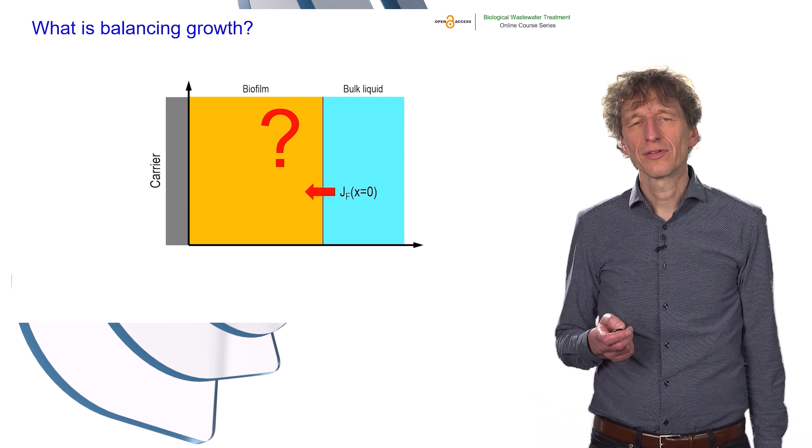Earlier in this course, we calculated the flux of substrate into the biofilm for steady-state conditions. Substrate diffusing into the biofilm leads to growth of bacteria. Question: how can there be a constant steady-state biofilm thickness if new biomass is continuously being produced by growth? On one hand, decay processes balance growth. But in addition to decay, there must also be detachment processes balancing growth. This module is focused on these detachment processes.

At the end of this lecture, you should be able to explain different mechanisms for the removal of biofilm, i.e. detachment. Prepare a material balance considering growth, decay, and detachment. And use the material balance to calculate steady-state biofilm thickness predictions.

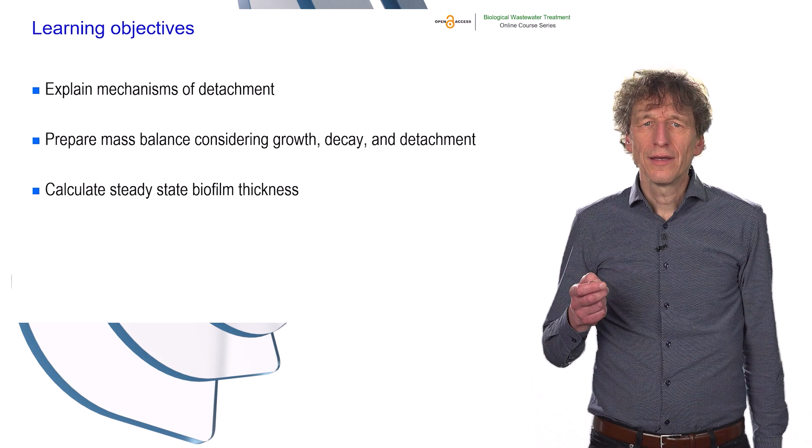Here's a schematic of a biofilm. Let us now prepare a mass balance for the biomass in this biofilm. Accumulation is shown on the left. The terms on the right refer to biomass growth, decay processes to remove biomass, and then the detachment processes.

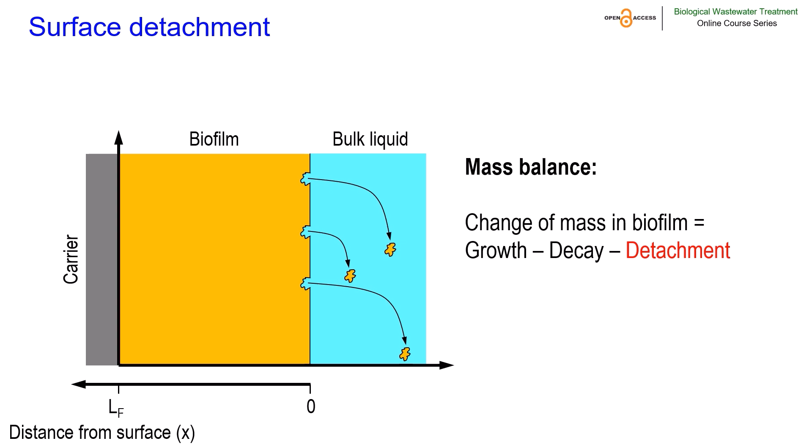Detachment is usually considered a process removing biomass from the biofilm surface. In the literature, we find a diversity of detachment rate expressions, as shown in this table. Some detachment rate expressions are linked to biofilm thickness, others to shear or to growth rate. There is a diversity of detachment rate equations, and we do not really have a good understanding of what equations to use in what type of reactor, nor a good quantitative understanding of rate coefficients.

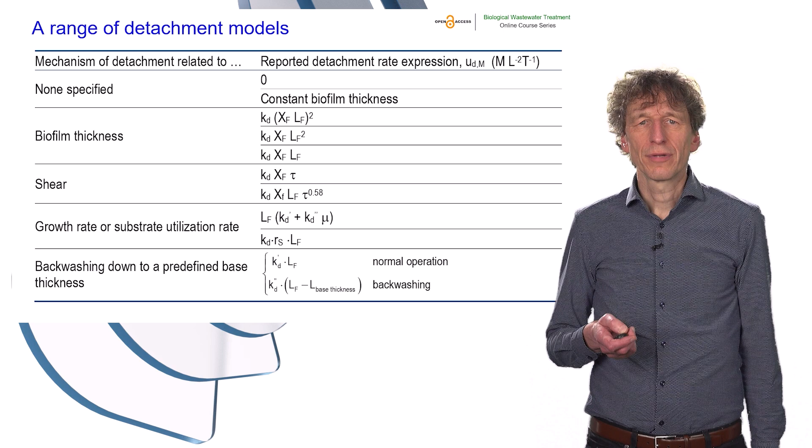But let us take a look at the benefits of explicitly modeling biofilm detachment. We will do an example assuming the highlighted detachment rate that is proportional to the biofilm thickness LF.

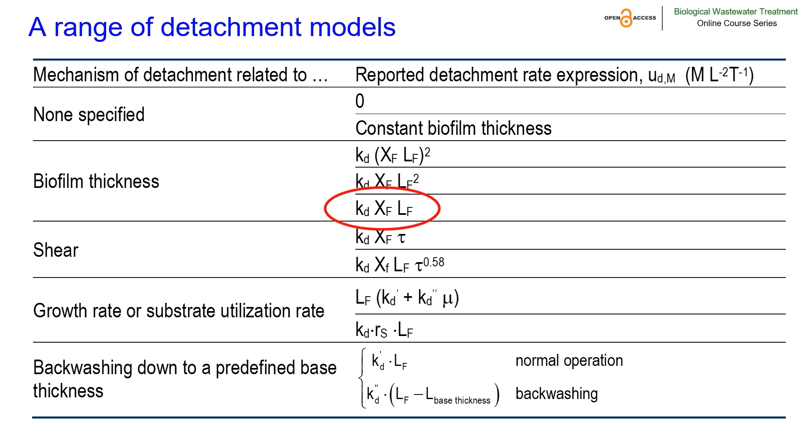Here we prepare a mass balance. Each term in this mass balance has dimensions of mass per time. The term on the left-hand side describes accumulation. The first two terms on the right-hand side represent biomass growth and decay per unit time, respectively. The last term on the right-hand side is the biomass detached from the overall biofilm per unit time.

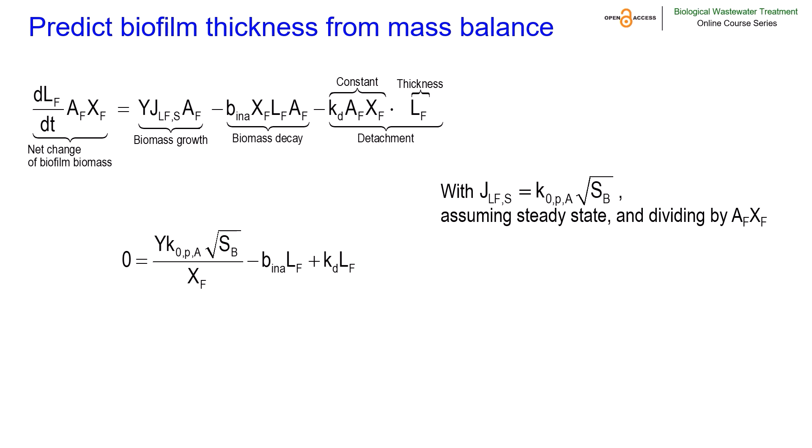We now assume half-order kinetics and substitute the corresponding substrate flux. We assume steady state, and then divide by the surface area AF and the biofilm biomass density XF. Next, we rearrange this equation to get an explicit equation for the biofilm thickness.

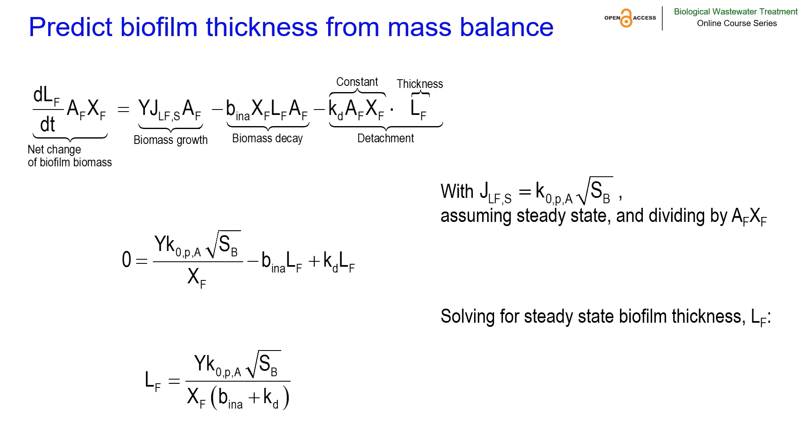We see that the biofilm thickness increases with increasing substrate utilization rate and increased bulk phase substrate concentrations, and decreases with increasing decay and detachment rates. This makes sense. This result is very plausible and allows us to predict biofilm thickness.

This is useful, but one major problem is that neither detachment mechanisms nor the kinetic parameters in the detachment rate expressions are well understood. One consequence is that many commercial simulators simply ask users to provide a fixed biofilm thickness as a model input rather than predicting biofilm thickness as a model output.

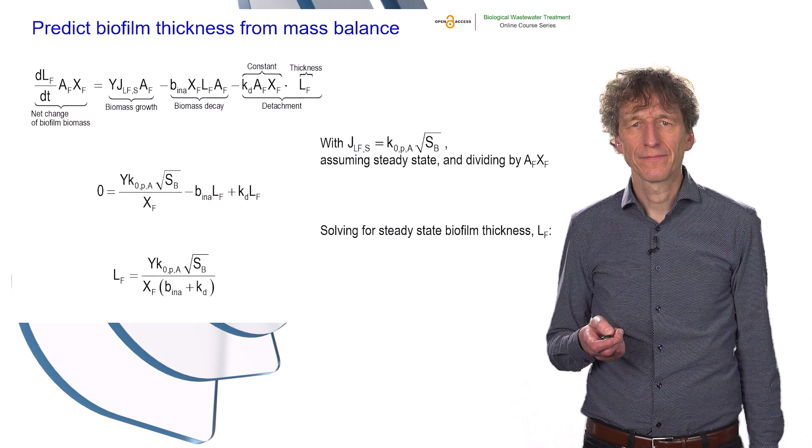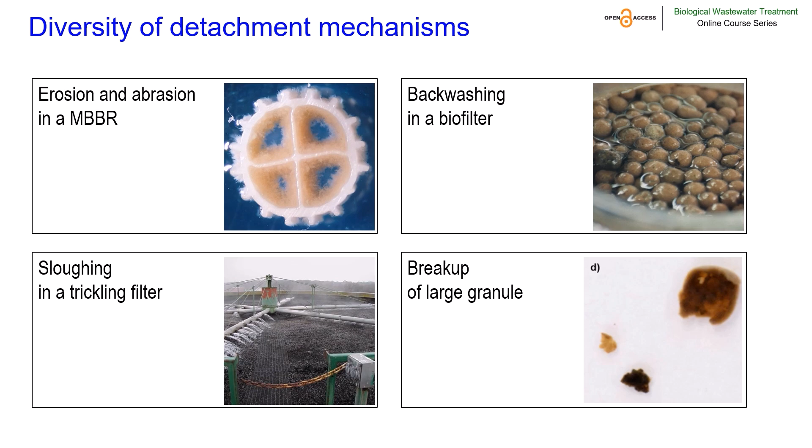If we look at the diversity of biofilm reactor types, we can also expect a broad range of dominant detachment mechanisms. In some cases, continuous erosion and abrasion will dominate. In others, detachment is a dynamic process triggered by dedicated backwashing events or spontaneous sloughing or breakup. It is obvious that a simple detachment rate expression will not be able to predict this diversity of processes.

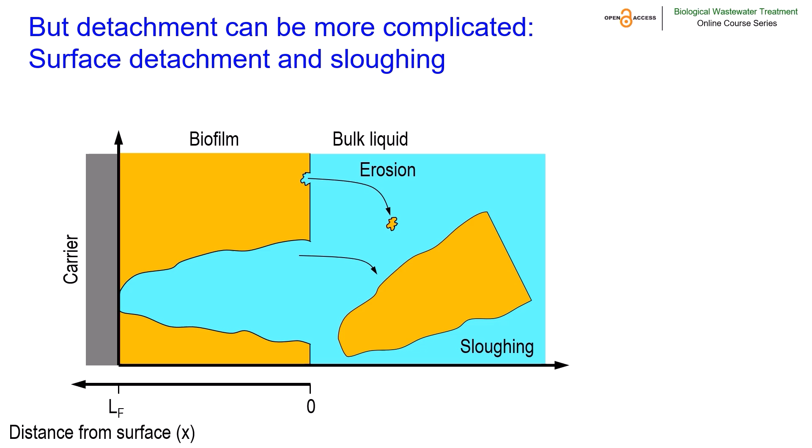Here's a cartoon version of different detachment processes. Note that simulators usually assume that detachment removes biomass only from the surface of the biofilm. They do not model sloughing. But in practice, sloughing can remove larger parts of the biofilm. The type of detachment will in turn have significant impacts on the composition of bacteria in the biofilm.

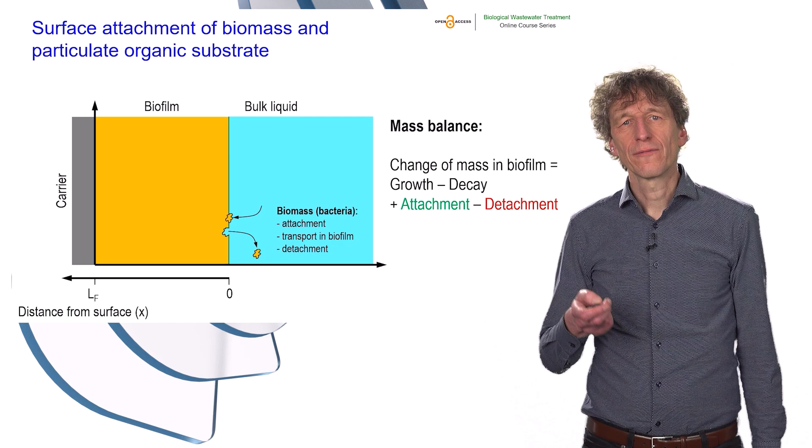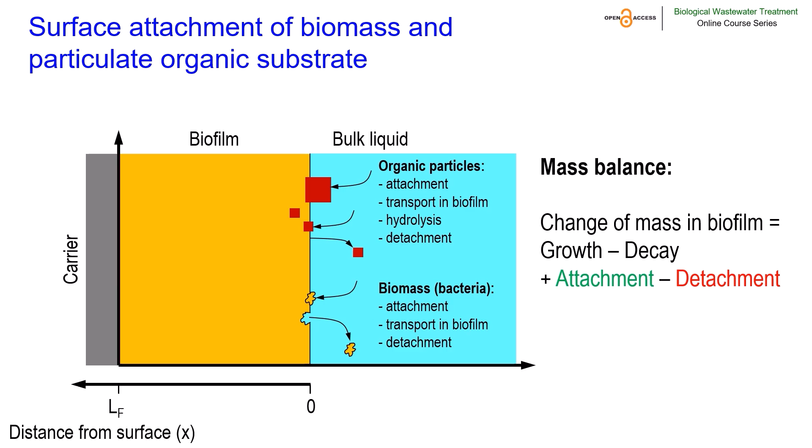Mass balances for biomass can get even more complicated. In addition to growth, we need to also consider attachment processes. If there is active biomass in the bulk phase, for example in an IFAS reactor configuration, then we need to consider attachment of bacteria from the bulk to the surface of the biofilm. Next, we need to consider a certain movement of bacteria within the biofilm, and then also attachment and detachment of particulate organic matter to the biofilm surface, and transport and hydrolysis of particulate organic matter in the biofilm.

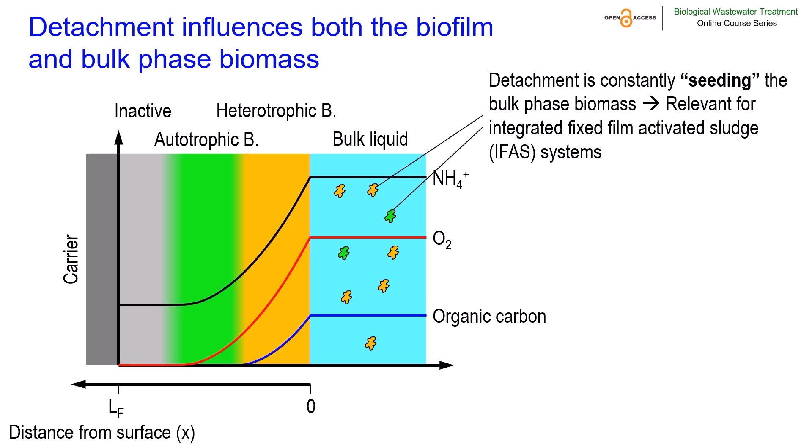In addition, we need to consider the influence of detached biomass on the bulk phase microbial community. Detachment of active biomass results in a constant seeding of the bulk phase. In an IFAS system, this seeding can in some cases maintain nitrification by the activated sludge, even if solids retention times of the activated sludge would otherwise result in washout of nitrifiers.

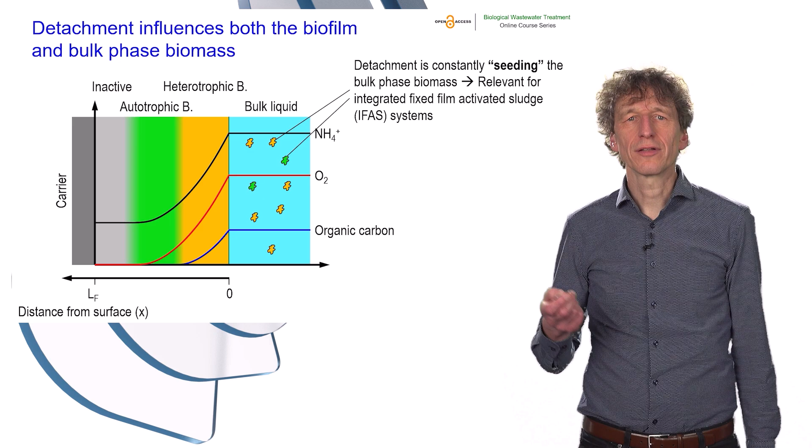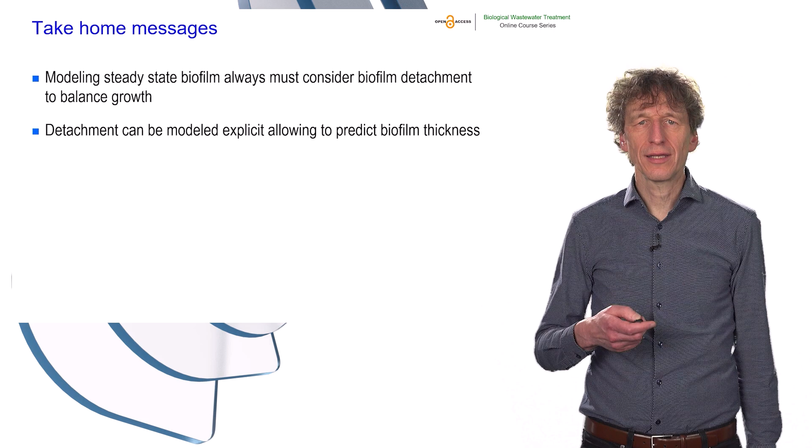So the take-home messages from this module are the following. Biofilm modeling always considers biofilm detachment. This can be done explicitly, assuming a detachment rate expression, resulting in a constant biofilm thickness as a model output from the balance of growth, decay, attachment, and detachment. But modeling often considers detachment only implicitly by assuming a constant thickness biofilm, resulting in a biofilm detachment rate that balances growth, decay, and attachment for this given fixed thickness.

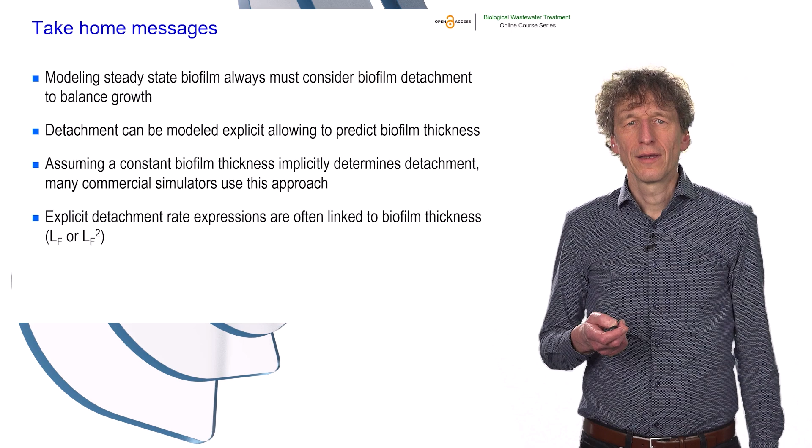Many commercial biofilm simulators assume a constant biofilm thickness. Detachment rate models are often a function of the biofilm thickness or the biofilm thickness squared, but factors influencing detachment are not well understood. Ultimately, detachment and attachment are three-dimensional processes that are really difficult to capture in one-dimensional models. Mechanisms of biofilm detachment are very different for different types of biofilm reactors. Competition in biofilms is influenced by this detachment.